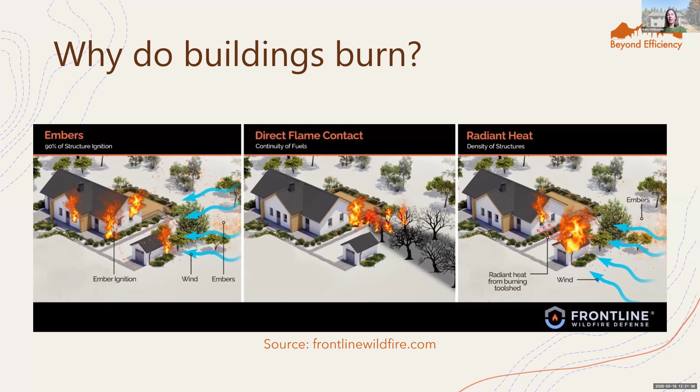So we want to focus on openings. We want to think of areas where embers can collect, and if there's combustible material in that area that could ignite, and then ignite other combustible materials that are adjacent. Obviously direct flame contact is also important. Radiant heat is another pretty big one, and that's where some thought around how windows are designed and detailed can go a long way. So we're going to dig into examples of all of these.

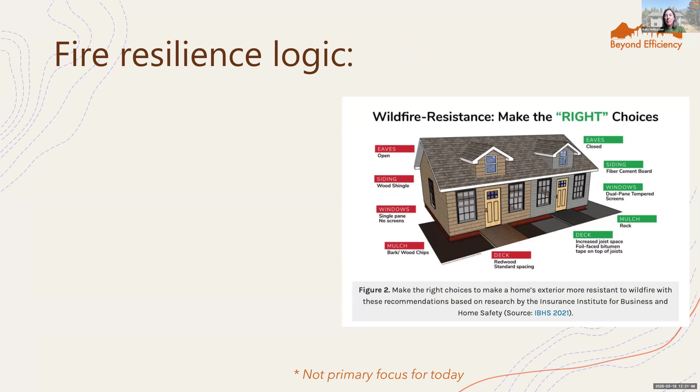Sorry, you might have to go through, some of these have animations. Is it Cyril who's advancing? Yes, yes, I'm trying - okay, thanks Cyril. Yeah, really sorry about the issue. I'm gonna press the button.

Something we like to think about, rather than trying to reduce energy loss or save water, is how do we get to the root of the problem to start with. When we think of wildfire risk, we want to minimize risk from the outset, and that's where defensible space comes in. We're not going to talk about defensible space today.

We're really focused on the building itself, since that's our area of expertise, particularly ember and flame smart design strategies. When possible, we eliminate small openings, or otherwise reduce their number. And where there are openings, we protect them - we'll get into details on that.

Tempered windows - I think there's been a lot more awareness and focus on the specification of windows with these recent fires especially. This is a great little graphic from the Insurance Institute for Business and Home Safety that highlights some of these things.

So then if fire does start, how do we minimize its spread? Step two: we want fire not to start in the first place, but if it does, we want non-combustible materials, things like properly placed dampers in HVAC system ductwork to minimize fire from spreading or minimize embers from getting deeper into the system. The final step, if you advance, is to put the fire out, obviously. But we're focused on steps 1 and 2 today.

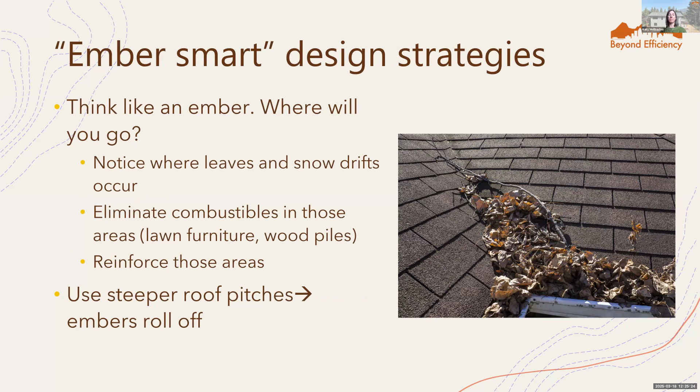Another general tip is to design steeper roofs, where if embers land they're more likely to roll off. I can't tell you what the sweet spot is, but as a general rule, all things being equal, a steeper roof is going to reduce embers from sitting in one spot.

Another thing is fire smart design - if active flames do start in an area, where are they going to tend to get stuck and grow from there? I think this is what a lot of us are most aware of when we think of fire smart design - areas like soffits and balconies. So just being aware of where those are, and all things being equal, if you can eliminate the problem from the outset by not having those things, that's great. But we're also designing for people and for functionality, so it's not going to be possible to completely eliminate these risks - so minimizing them when reasonable. And then finally, with whatever is left, considering: if flames do end up in an area, how can we prevent that from spreading?

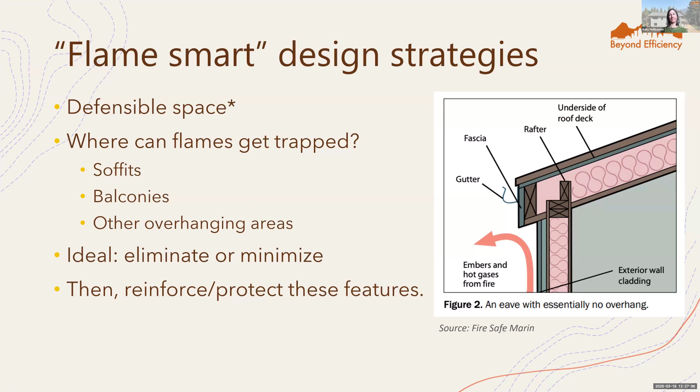Small openings are a major contributor to embers getting inside the envelope of a house and starting a fire in the attic or in some sort of space.

Jay, you mentioned a statistic earlier about the fires ignited by embers, what percent got trapped in an interior place. Did you say that was 80 or 90%?

They said that 90% of the residential buildings that caught fire by embers, according to firemen discussing it, as they looked up and down the streets, were catching fire from the inside more of the time than from the outside.

A way to understand that is the wind was blowing 70 to 100 miles an hour in this storm. In the same way that air blowing over an aircraft wing causes molecules to spread apart and lift the wing, when wind blows around or over a building it depressurizes it, sucking the air out. It will even break windows sometimes.

Embers blown in a 70-mile-an-hour wind don't land on your roof very often. But the house is breathing back in, because all the air has been pulled out as the wind goes over it, so those embers get sucked into the attic vents, crawl space vents, cracks under windows or broken windows, under the door, and catch the drapes or the rug on fire.

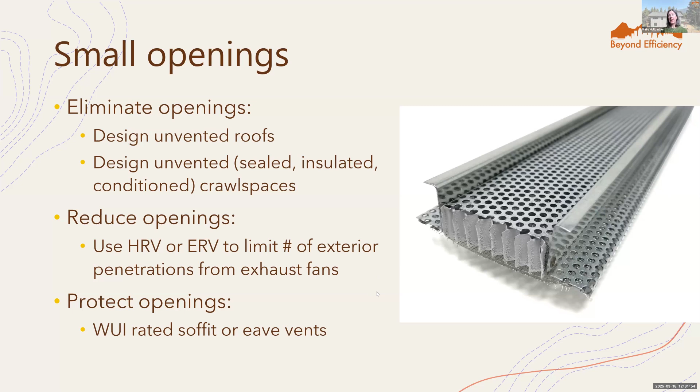And then where you do have openings, just ensure everything is WUI rated. But that doesn't cover mechanical openings, so we'll be getting more into that later as well.

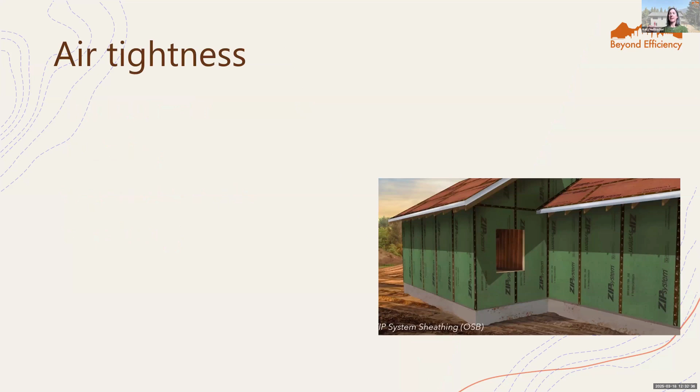And if you could advance again, I'm just highlighting this item at the top for source control. If you could advance... oh actually sorry, that was on my other one, I think I added it later. What happens if you advance? If you press the arrow, okay thank you. Oh yeah, just go back again.

So, you know, number one, just from an air quality standpoint, as well as resilience and minimizing fire risk. An airtight, or reasonably airtight - when it comes to passive house we would say very airtight, but whatever makes sense for the project - is a really important step for fire safety. Because if you can minimize air getting sucked through an assembly, it is a great fire resiliency feature.

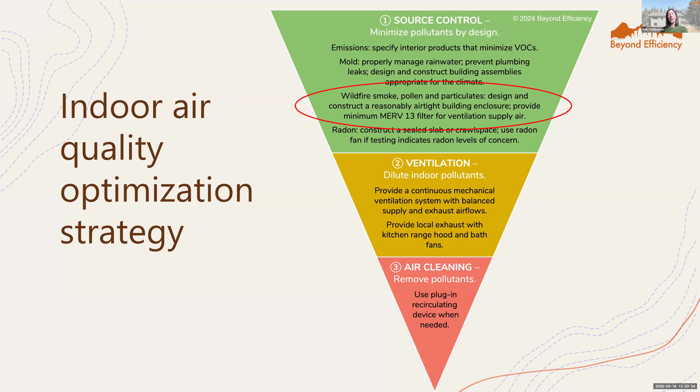We're not going to focus a lot on airtightness today, but from a best bang for the buck approach that also aligns with typical construction practices, not necessarily the European approach of putting sheathing on the inside - that can be a great solution but it's not something we tend to do since it complicates structural design and other things - there's so much benefit in designating the exterior structural sheathing as a primary airtight layer. And if you do self-adhered products, you get a great weather-resistant barrier, and also a good starting point for a comprehensive airtightness strategy across the whole building.

There's a lot that goes into airtightness detailing. The weak points we typically see are sill plates at the top of the foundation wall, and overhangs created from roof rafters that penetrate exterior blocking - those just need thought to be properly sealed. We're not going to get into details in the interest of time, but basic passive house practice of a lot of attention to airtightness really is an important strategy for fire resiliency.

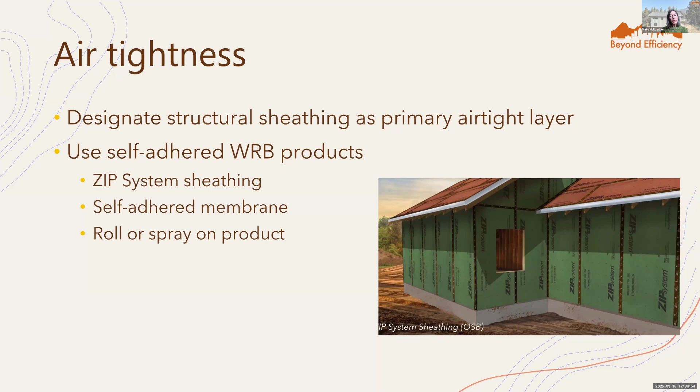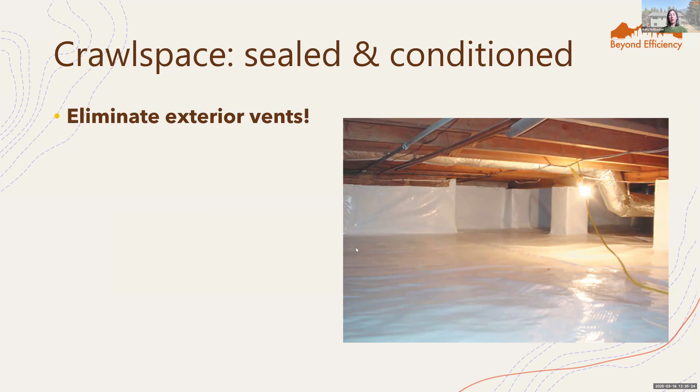Okay, so sealed and conditioned crawl space. Depending on the climate and how the above grade walls tie into the foundation, what's generally appropriate for coastal California is insulating the crawl space walls inside or outside - different ways to do it - and then either the entire floor of the crawl space or at least coming in some amount, again depending on climate. But the main point here is don't vent the crawl space - we want to eliminate all those exterior vents. This solution does so much better than the decades we spent venting crawl spaces, and this is the case for almost everywhere in the country.

You want to insulate walls, seal all the surfaces with a vapor barrier. The conditioned part means this has to be considered conditioned space and exchange air with the main house - there are different ways to do this. What we generally do if we're doing an HRV or ERV in the main house is have one exhaust duct serve the crawl space, and then it just needs a passive relief grill, like on the floor of a pantry, so you're getting that air exchange. Again, not much is needed - only 1 CFM per every 50 square feet.

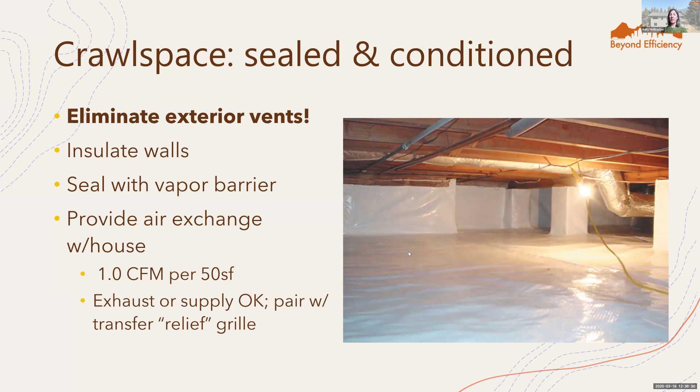There's a lot - we could spend a whole two hours on roofs, but we'll try to keep it high level, with fire resiliency as a primary goal. Doing an unvented roof is definitely going to be the best practice, but that can get tricky with how you do an unvented roof without having condensation issues.

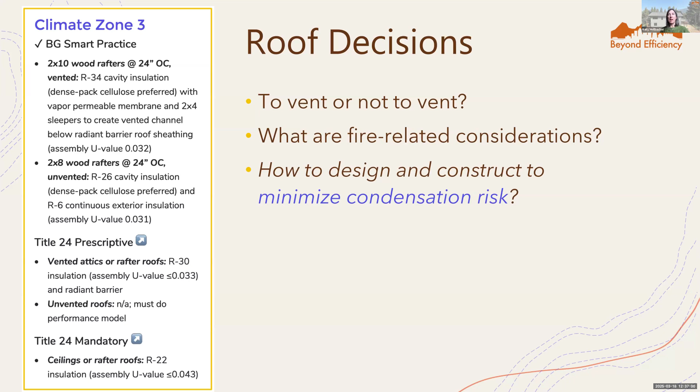So on the next slide we'll highlight and remind everyone of the different methods for designing moisture safe roof assemblies. The first one is to keep the sheathing warm enough so that moisture migrating through the roof assembly can't condense, or at least can't be at those condensing conditions long enough to cause issues - that's where above deck insulation comes in. But for a lot of you here, it's another expense and step. We usually already have so much R-value in the roof, there isn't necessarily a huge benefit from getting another R5 or R10 above, in terms of the roof's contribution to heat loss in a home.

So that just adds complexity. There are other ways to provide a moisture-safe, unvented roof that's a good match in these WUI zones. One option, item B, is if you're only insulating the cavity itself, have either airtight or vapor-closed insulation directly adjacent to the roof deck. But unless you want to cut and cobble a rigid product in and seal the perimeters, which isn't very constructible, you're really looking at spray foam on the bottom. We really advise against spray foam when you can design around it, so we're not a fan of option B in most cases.

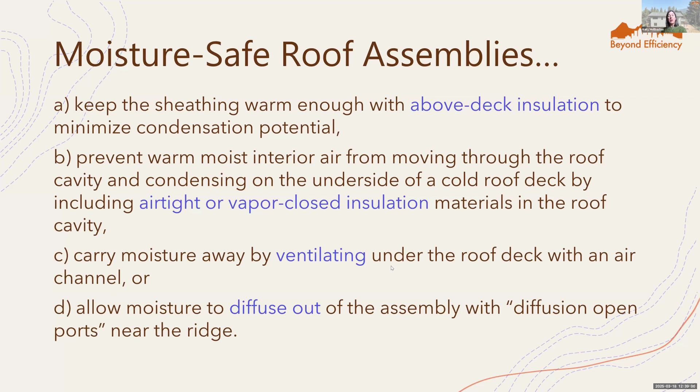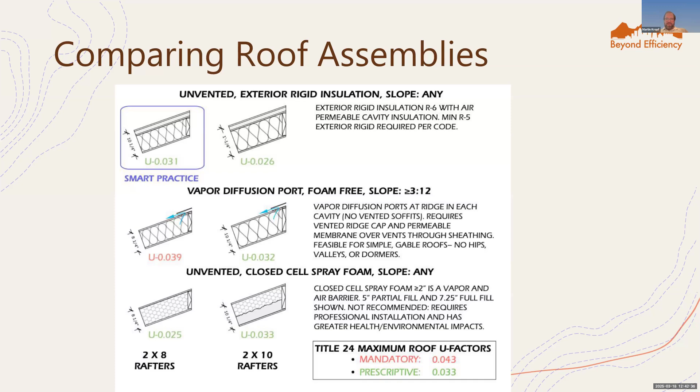Thank you. Yeah, thanks, Martin. Okay, we can go on, Cyril. I think Nate is going to take it over from here.

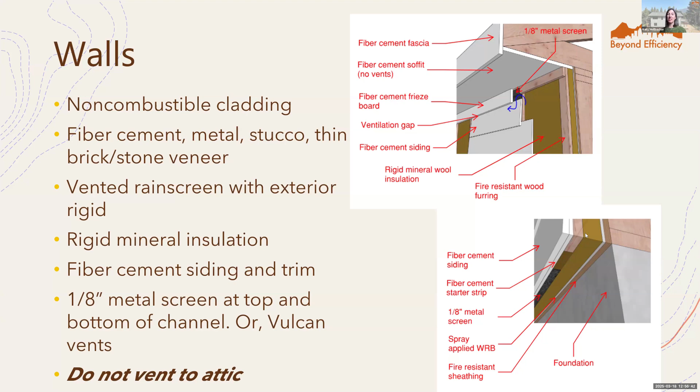In the interest of time we should probably move on, but I wanted to make a couple comments. Dietmar, appreciate your notes about things like fire resistant sheathing - that's a big cost. And I think, where appropriate, intumescent paint can be a great solution where there's some isolated material or thing that you want to cover up.

One other quick comment on John's offering of, can you do two different layers? I think anything's possible. We're not ourselves experts in all the different variations of fire rated assemblies, and what's the difference between a fire rated assembly versus something that hasn't been tested but really works. We're looking at this more through the lens of what works. But from a cost standpoint, every time we're on the building it adds a lot of cost and complexity, so I'd be a little hesitant about two different layers of something when maybe there could be a simpler way. Then you can get into where does dense glass play a role when you really need a robust assembly. But yeah, we should jump on.

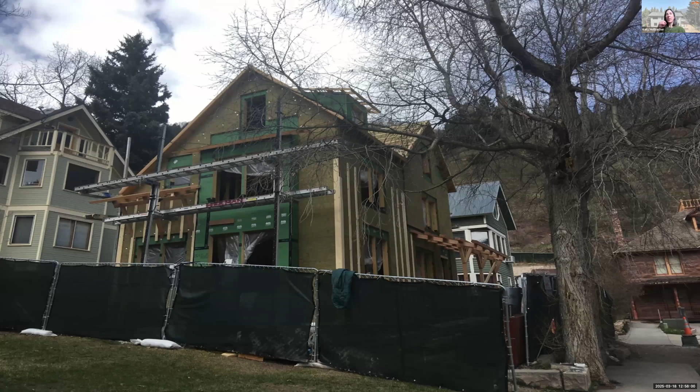We're going to go back to Nate, but I'll briefly comment here. This was a house in Telluride that didn't necessarily go in with a lot of fire resiliency features in mind, but we have a couple pictures just to show the detailing of furring over mineral wool. This uses ZIP System sheathing for a great airtight foundation, and then furring strips. Nate, back to you.

We might want to motor on and get to the HVAC stuff, but I don't think we have much left before just a slide or two on some mechanical considerations.

I'll go quickly - I'm sure you're all well aware of the benefits of outsulation. You eliminate a pretty significant penalty, so it's quite the advantage to include it, and it adds some long-term durability improvements, with the main one being it keeps that sheathing layer warm - the colder the climate you're in, the better that warmer sheathing is for performance. Of course, when you're adding that exterior rigid insulation, it adds some complexities and additional detailing around where you're going to locate your windows, where you're going to locate your WRB, and how to attach your cladding.

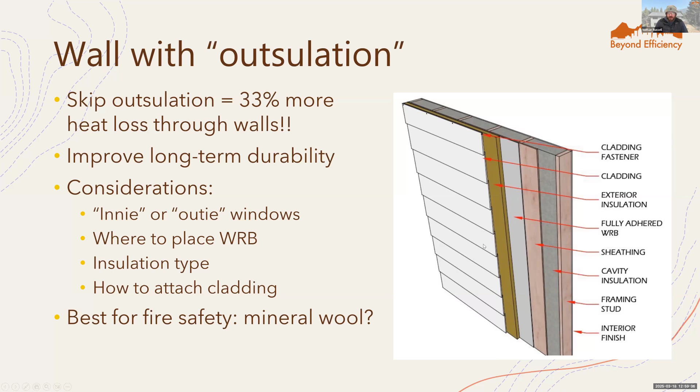We can go to the next slide. On that note, RDH has a great presentation and document on attaching cladding over exterior rigid insulation, and it looks at all your lightweight options, your wood or fiber cement siding, all the way up to your stone and brick veneer and whatnot. Then if you go back.

Just a quick one I wanted to call out - Dietmar, you mentioned the challenge of mineral wool, which, no arguments there. If you haven't checked it out, the Helix Heco Topix Therm screw is pretty interesting. If you have used it and it didn't work for you, I'd love to learn more about it, but this can be a really good solution to help with mineral wool applications.

Also on furring, I've had personal experience trying to install furring strips over thick layers of exterior rigid insulation. One thing I found was I just had to pre-drill the top and bottom holes for the screws, and that pretty much eliminated any splitting. Just anecdotally, sample size of one, but it really seemed to help.

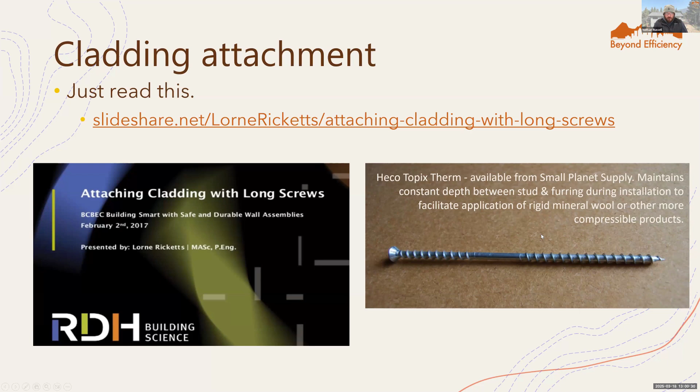So we can. If you keep clicking, it's an animation again.

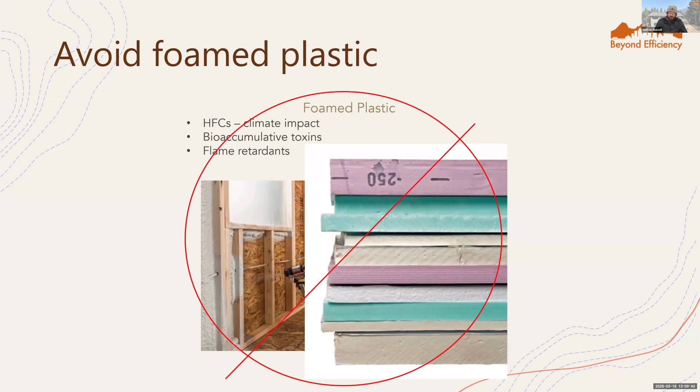So we prefer to avoid foam plastics. Again, there's a trade-off with costs, but the plastic insulations just have environmental and health impacts to consider. And when we're getting into fire safety, they do have flame retardants in them, but are they good enough for wildfire situations? Is it adequate enough is an open question.

So we do like to work with the more natural insulations like cork, wood fiberboard, and mineral wool, and those are in descending order of cost typically. We just want to quickly highlight that there is now a domestic manufacturer of wood fiberboard insulation, so we're hoping that drastically reduces the cost since it doesn't have to be imported from overseas.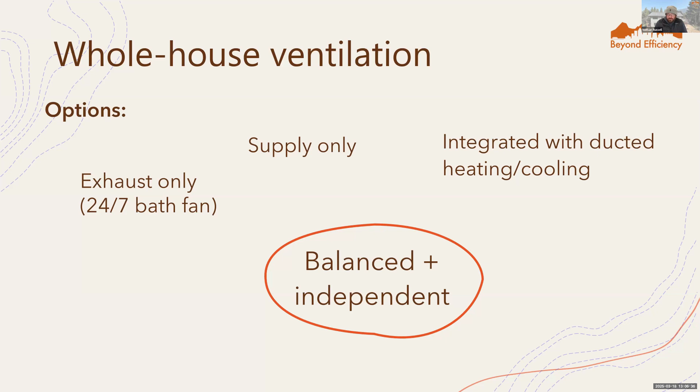You can use a heat recovery or energy recovery ventilator. The main difference is heat recovery is sensible heat, the temperature you feel, whereas energy recovery also recovers moisture, transferring some humidity between the incoming and exhaust air supplies. Importantly, they do not mix; it runs through a different type of heat exchanger depending on whether it's an HRV or an ERV.

These systems are balanced, so you're not creating an imbalance within the house, as you would with a supply-only system, where you'd be pressurizing the house, or an exhaust-only system where you'd induce negative pressure. During wildfires, you can either reduce the airflows or turn off the system depending on severity, but with MERV 13 filters, those do a pretty good job filtering out wildfire smoke and particulates, so it's usually not advisable to turn them completely off.

Is there a preferred strategy for makeup air for a separate range hood? That gets into whether you're pushing an all-electric house. One of the main concerns with not having makeup air for kitchen exhaust is backdrafting any combustion appliances, particularly natural gas appliances that are naturally or atmospherically drafted, and less of a concern with sealed combustion systems.

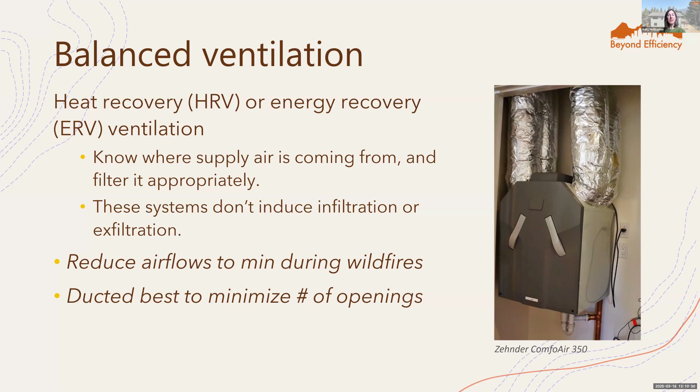Going quickly again -- your Vulcan vents aren't necessarily appropriate for mechanical ventilation systems just because they include an eighth-inch mesh on them, which is basically a filter in itself. With mechanically vented systems, that eighth-inch screen is likely to clog frequently and require frequent cleaning. So there are certainly some maintenance concerns and trade-offs there, and I think it's going to be something that's irregularly maintained and leads to issues.

As an alternative, you can install a butterfly damper on your exhaust, and those will just open whenever the system is running and close when the system is off. On the fresh air supply side, though, the damper application isn't as straightforward because you want the damper to open and allow air to come into the building. So there are a few options there.

Well, I guess the main option is using a motorized damper of some sort that's either interlocked with the system or on its own switch that you just flip off whenever there's a wildfire nearby, to basically prevent embers from entering into the system. And then the other important aspect is using metal ducting at least a few feet into the building, but ideally all the way into the appliance itself, so any embers that do find their way in don't have combustible material nearby. Or if you have flex duct, it doesn't just melt through and start providing a pathway into the building.

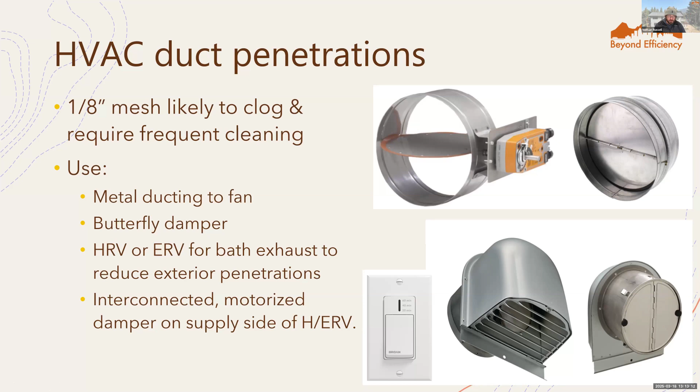This was fabulous. I wanted to just throw this question in here too: is there an advantage to using slight positive pressure in wildfire situations to prevent infiltration in unwanted areas? Thought that was an interesting question for you to wrap it up.

I don't know how we would test that. I mean, I think there's some benefits just for normal operation of slightly positive pressure, because with a standard MERV 13 on supply air, you're truly filtering the air coming in. But in terms of a fire resiliency strategy, my instinct is it probably really doesn't matter at all, because we might be talking about a slight pressure difference. Like that example Jay gave, if a wildfire's coming to your neighborhood, the winds are so high, a 10 CFM pressure or whatever minor pressure difference in the home, I think it's going to get diluted pretty quickly by the pressures that come from the wildfire coming through. Great question, but that's kind of my instinct, I'm not sure.

And Cyril, if you could just go one more, then we're kind of on the... can

I ask a question? There are zillions of homes that have vented attics, and there are wildfires that can occur anywhere. The state fire marshal has 4 kinds of approved vents. And my question is, if you install state fire marshal approved vents correctly, and there's a wildfire, what is the experience of the firemen in the Palisades fire in those situations?